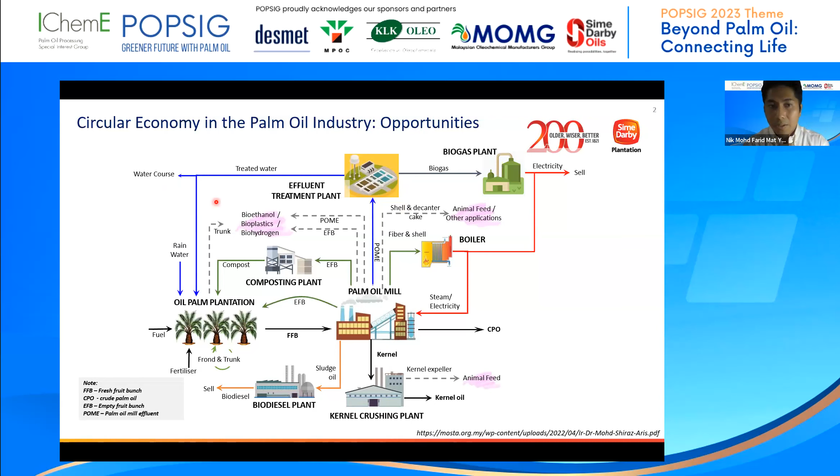So that's the current state for the palm oil mill effluent. So before we look at the problem that we have, let's look at what we have first. What we have in place is that with palm oil mill effluent, we have enough so-called nutrient inside there, the COD inside there, whereby we can generate electricity using an anaerobic process. So that's why we are using biogas plants in our mills.

With that, we can generate electricity, produce renewable energy, and then either we use it in our mills through co-firing or convert to electricity, or otherwise we sell it back to the grid. So that way we can further improve our sustainability by being self-sustaining in terms of energy.

And then in terms of another technology that we currently already have, there is the solid removal and dewatering system. This is basically to automate the system maintenance. As I mentioned before, we have the solids removed from the pond for animal feed. This one can be used for fertilizer supplement.

And then we have further treatment until we reach the water bodies and comply with the BOD 20 compliance. So all of this we already have, and we already comply with the most stringent requirement by MPOB, by DOE, the Department of Environment of Malaysia.

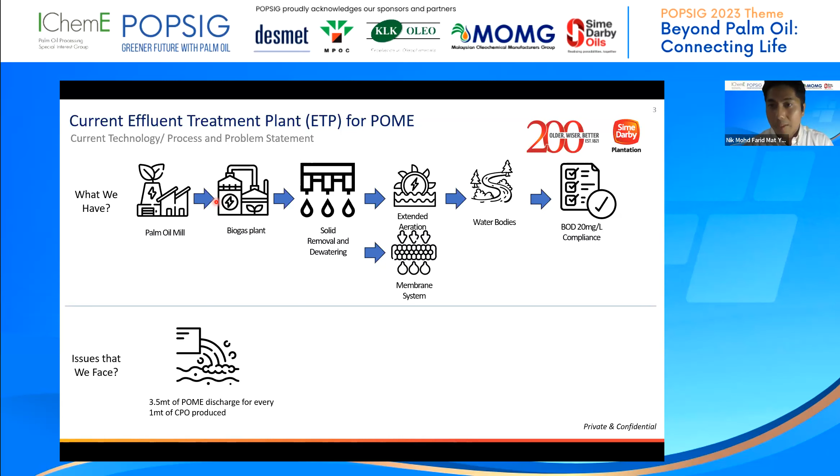So with all the systems in place, why do we need to see the gap and the problems we are facing now? So that we can further improve and take a step forward towards our target, which is zero liquid discharge. The first problem that we face is basically the volume of POME discharge itself. For every 1 ton of CPO produced, we are producing POME, our effluent, at the rate of 3.5 tons. So it's a lot of effluent being produced.

So let's imagine if we manage to develop something and retrieve all the areas, we can use them for something else: power generation, solar panels, or we can do replanting on the reclaimed area.

But because of the color itself, public perception still says that we are discharging so-called dirty water into the water bodies. In fact, we already treat it well enough for us to discharge to the water bodies.

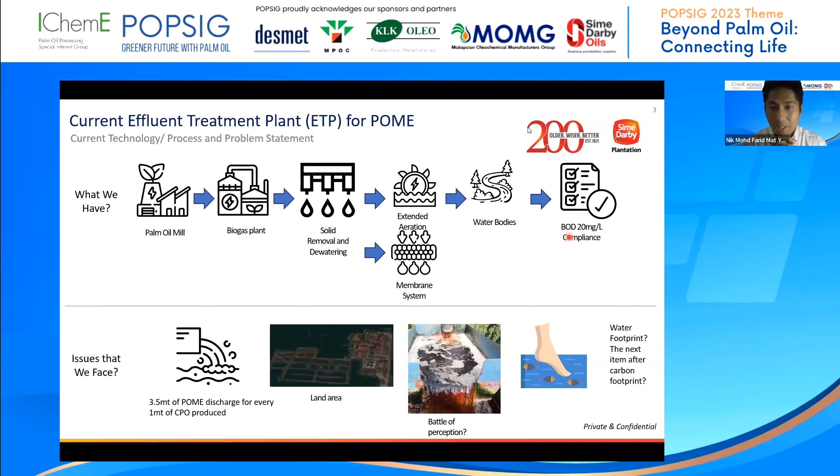And last but not least, it will be on the water footprint. As of now, the focus area that we are looking at is the carbon footprint. But once we manage to sort out our carbon footprint, aligning with the nation's requirement of carbon net zero by 2050, the next will be the water footprint. We want to reduce as much as possible so that we can make use of the remaining clear water for other purposes.

Okay, so looking at this, we need to look at the gap, the technology that needs to be developed for us to achieve the target. For us to achieve zero liquid discharge, meaning 100% of the wastewater, the palm oil mill effluent, needs to be reused or recycled back for the process or converted for any other usage. So there are two stages in which we want to proceed.

The first one is basically to reuse as process water, meaning we treat as much as possible so that we can reuse it as process water, using the water for part of the process to purify the crude palm oil during production. One of the requirements before we can reuse the water is the color itself. Even though the BOD is still okay, as I mentioned before, we want to remove the color.

But even if we manage to achieve that quality and reuse it as process water, the amount that we use in the palm oil mill will not be able to cater to the amount of POME being produced. Roughly, we are talking about only 50% of the treated POME able to be reused as process water.

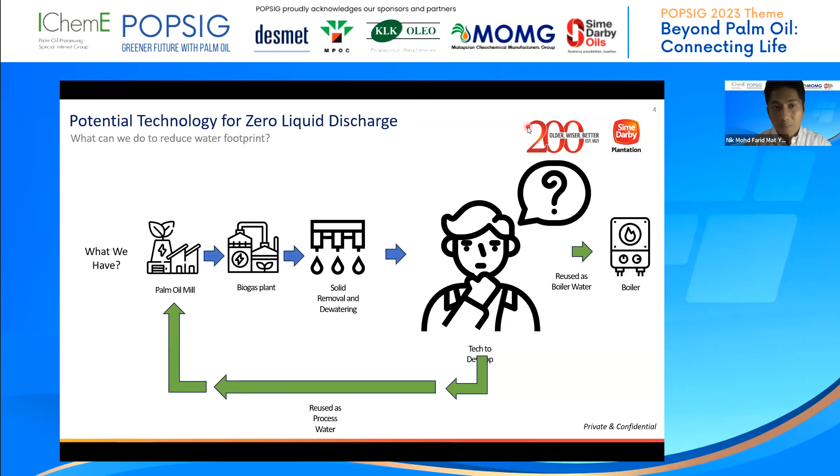And then the rest of it, we still need to discharge. So for us to be 100% recyclable, we need to look at another use case whereby it is reused back as boiler feed water for boiler treatment to produce steam for energy as well as for process usage. So these are the two stages that we have identified if we want to achieve the target of zero liquid discharge. Okay, then came the idea on how we want to go towards the colorless discharge.

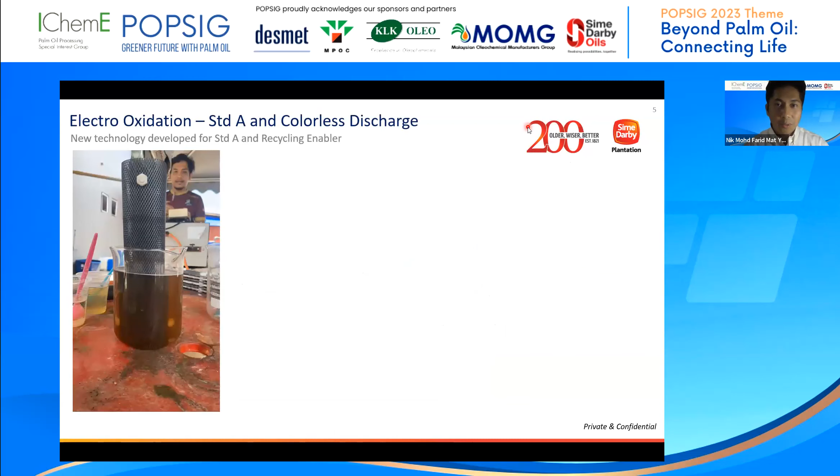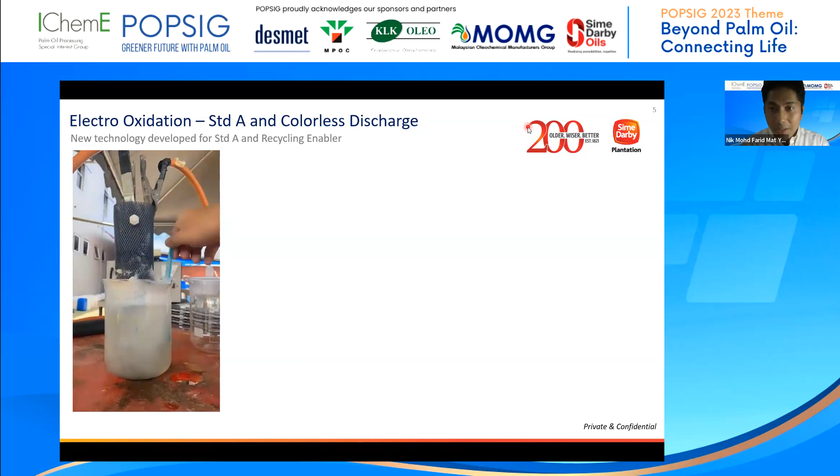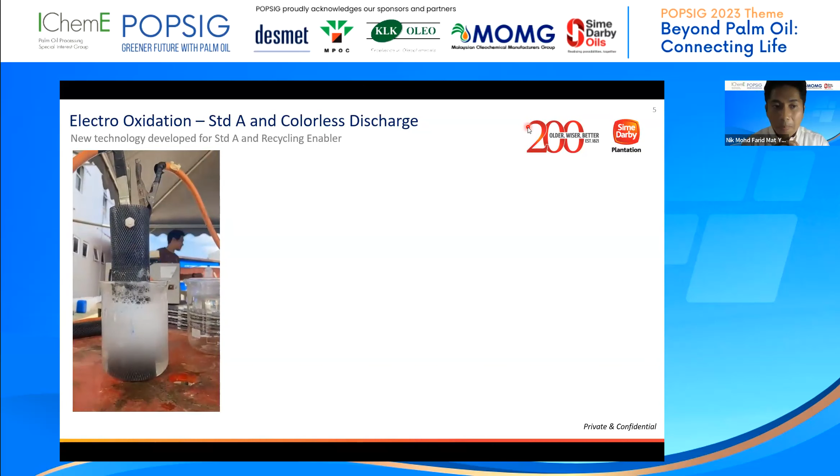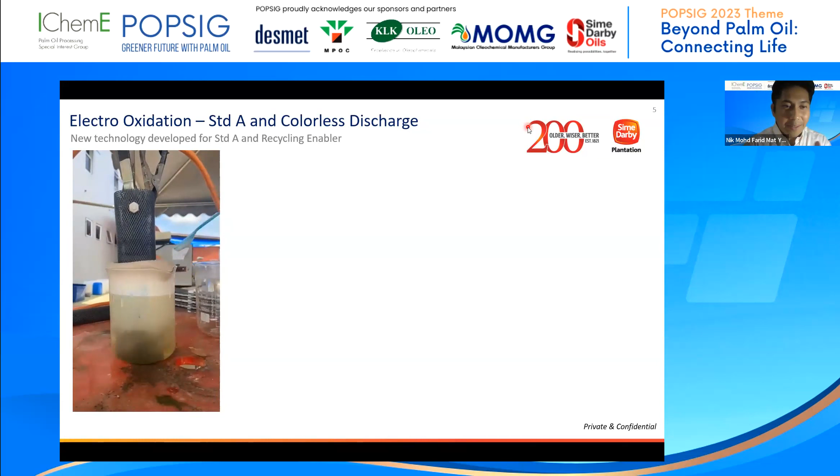So looking at the available technology in the market, we observed there's a new technology being used for the leachate treatment plant. The name is electro-oxidation, whereby it uses electricity instead of microbes to degrade the organic contaminant inside the wastewater. So we worked with a local technology provider to bring this technology to the palm oil mill. So the time-lapse video here shows, simplified at lab scale, how electro-oxidation can remove the color of the palm oil mill

POME itself. So electro-oxidation is not really a new technology. It's been researched and studied in journals for quite some time. But to bring it to commercial, there's not much success yet, mostly due to the capital expenditure as well as the OPEX. But when we developed it together with the local technology provider, instead of going with only a 2D electro-oxidation chamber, whereby we only have anode and cathode,

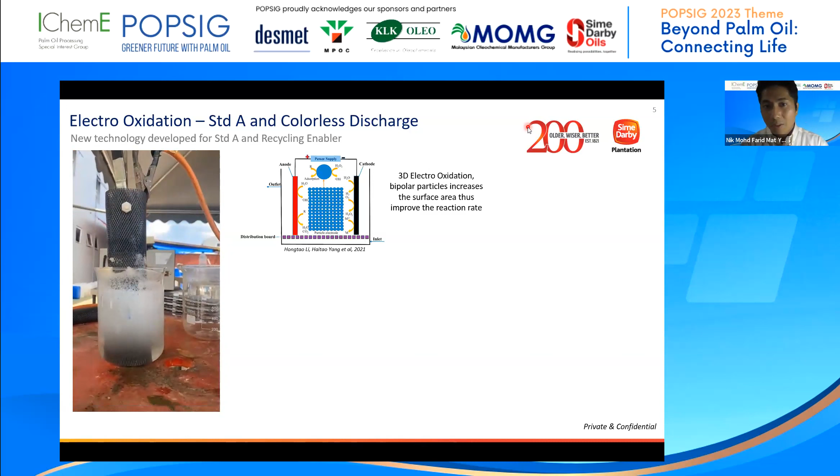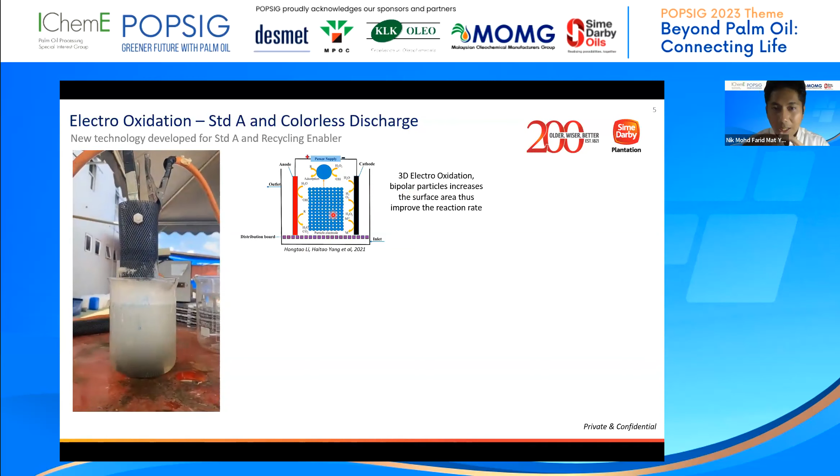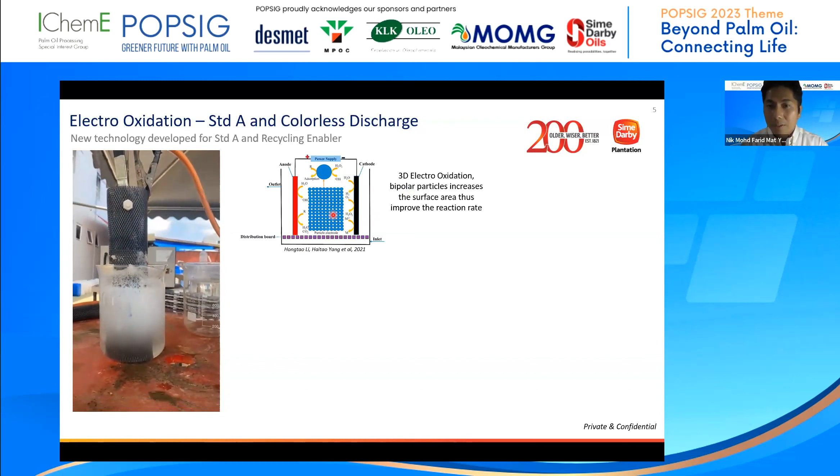we go towards 3D electro-oxidation, whereby we introduce bipolar particles in between the anode and cathode. So with this, we managed to increase the surface area as well as improve the reaction rate. That's why after the study, we managed to bring down the CAPEX as well as the OPEX to an acceptable level. Then we can proceed further with the commercialization trial. So 3D versus 2D, that's where the first innovation comes when we want to scale up.

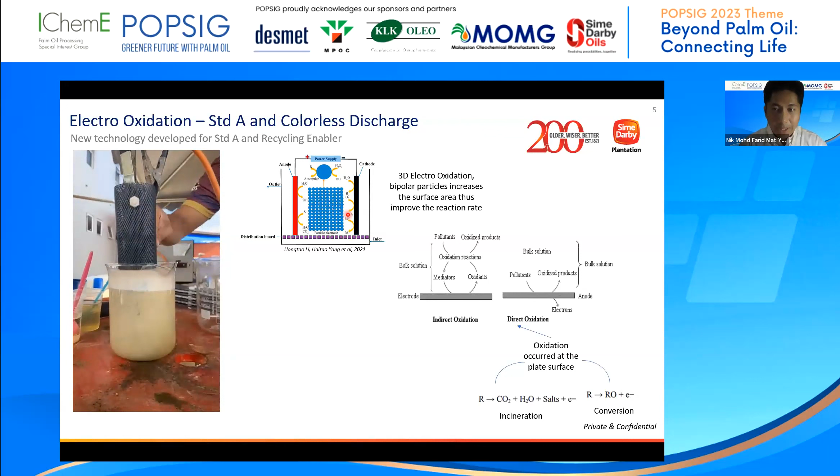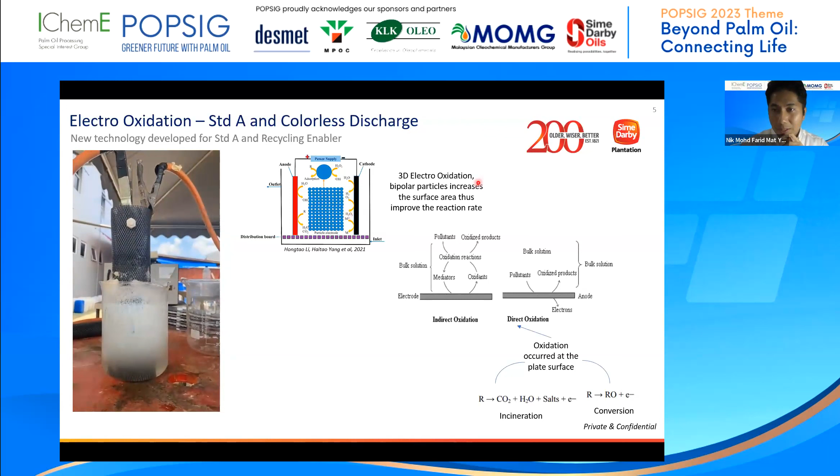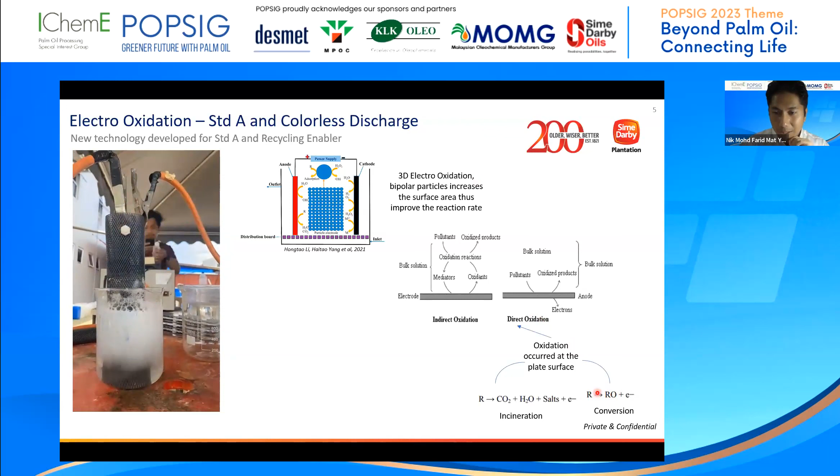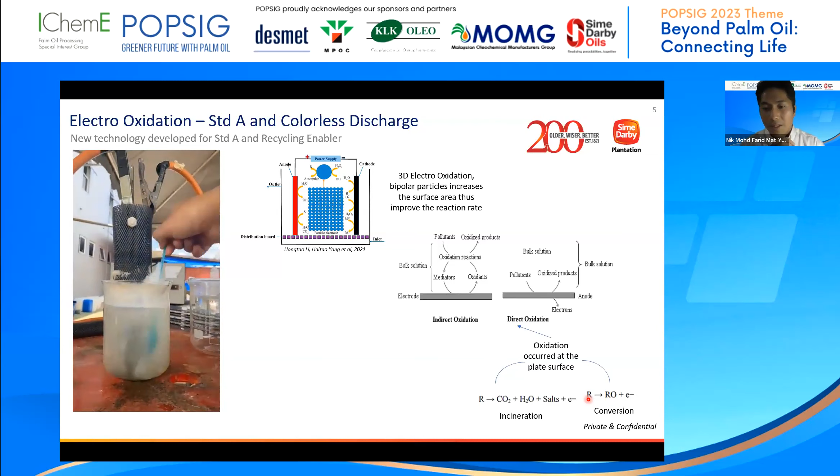And then to brief everyone in terms of what happened inside the beaker. It looks very, very simple, whereby after a certain time, the froth happens and then the color is degraded. So basically, there are two types of reaction here. The first one is the direct oxidation, which is at the plate itself. This is the simplified chemical reaction. R is the contaminant, whereby at the surface of the plate, it's converted to another material. Some of it precipitates out, and then we can remove it via filtration.

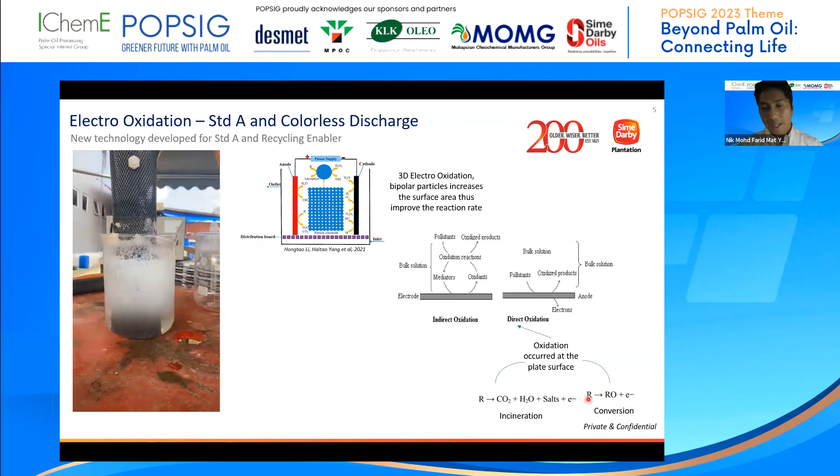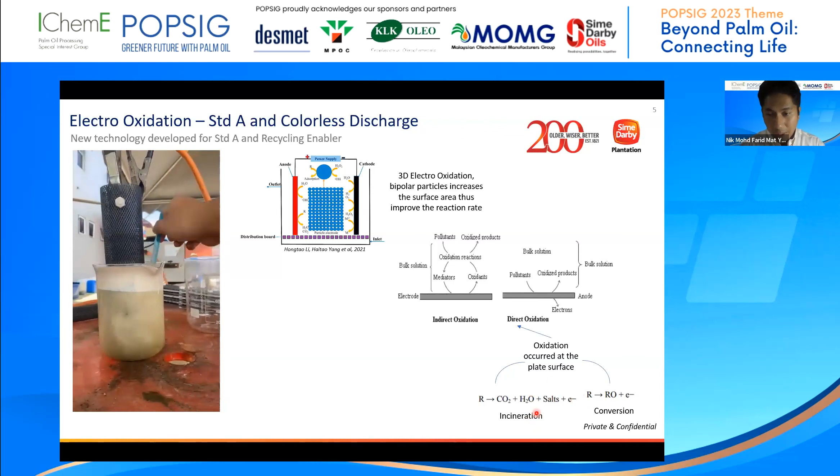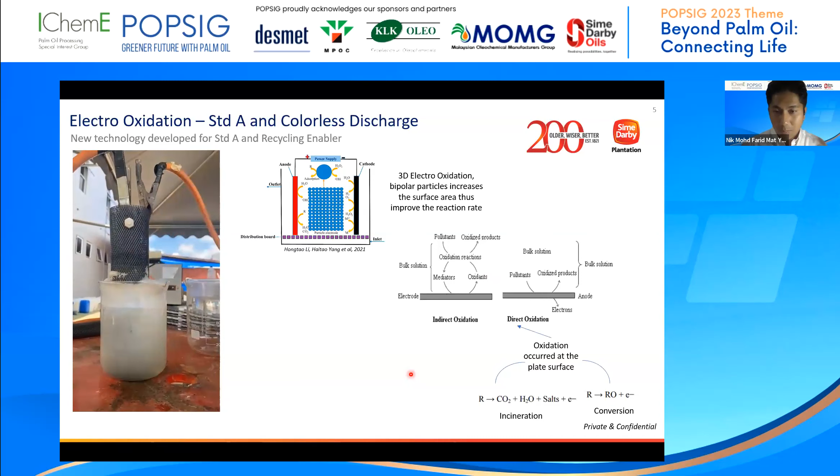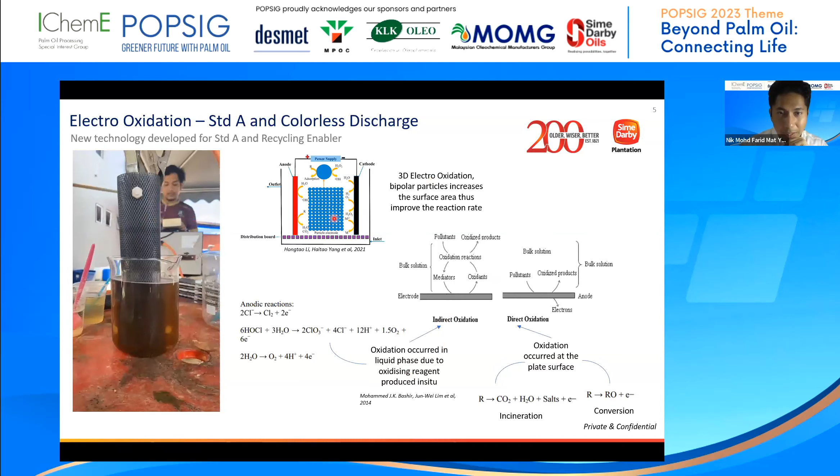And the other is further oxidized until it becomes carbon dioxide, as mentioned here, the incineration process. So the contaminant is either removed after being degraded up to carbon dioxide, or precipitates out as a solid, and then we can filter it out in the next process. The other one that happens is indirect oxidation. If you notice here, the reaction still occurs at the wall of the beaker, in between the plates as well, as shown inside the diagram here.

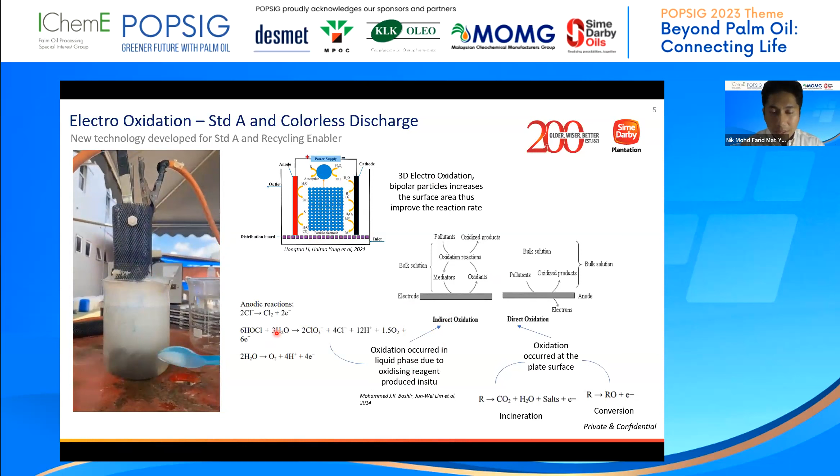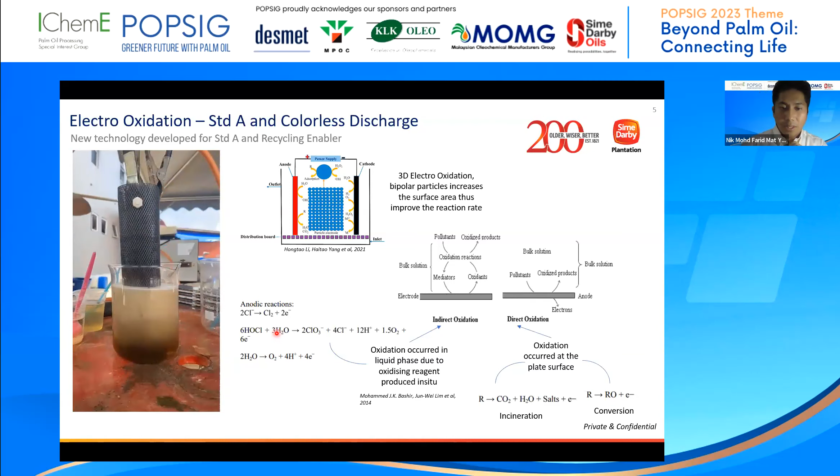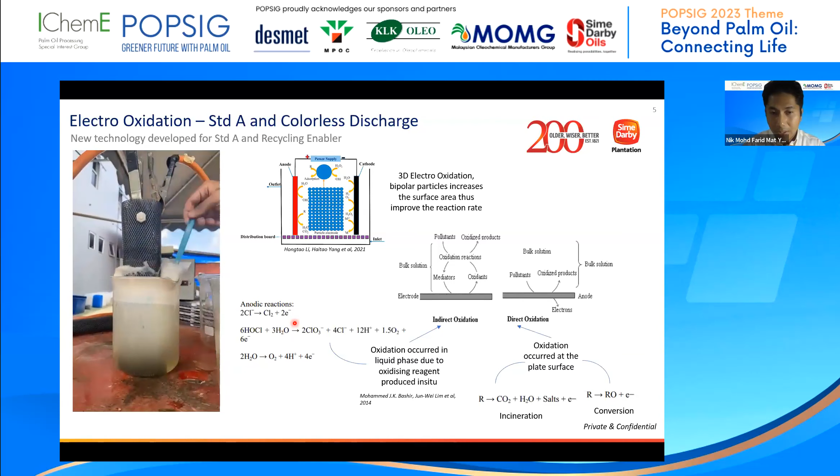So it's indirect oxidation, whereby we have several ions that already exist inside the water. Together with that, when we introduce the electrolyte, we have the chlorine, we have the sulfide. So all of it will be converted into strong oxidizing reagents. We have chlorine, hypochlorous acid, H2O2, hydroxyl radical. So this is part of the equation and the anodic reaction. So with direct oxidation as well as indirect oxidation from the oxidizing reagents, we managed to remove the contaminant well enough that we produce not only Standard A, BOD 20 milligram per liter, but also colorless effluent.

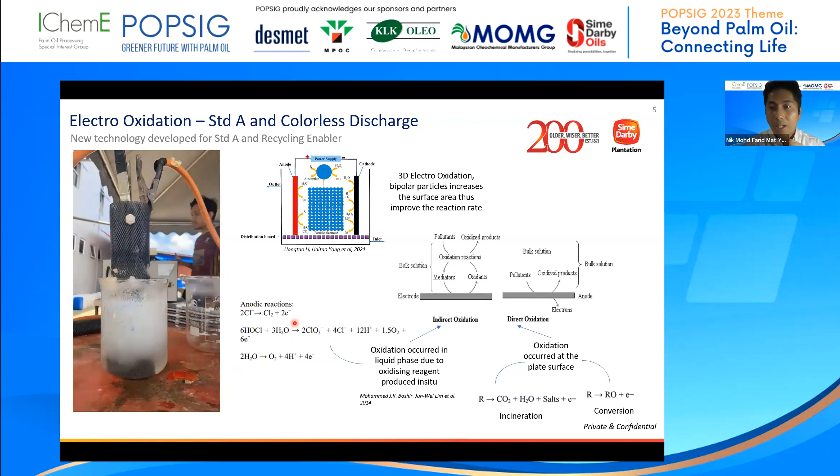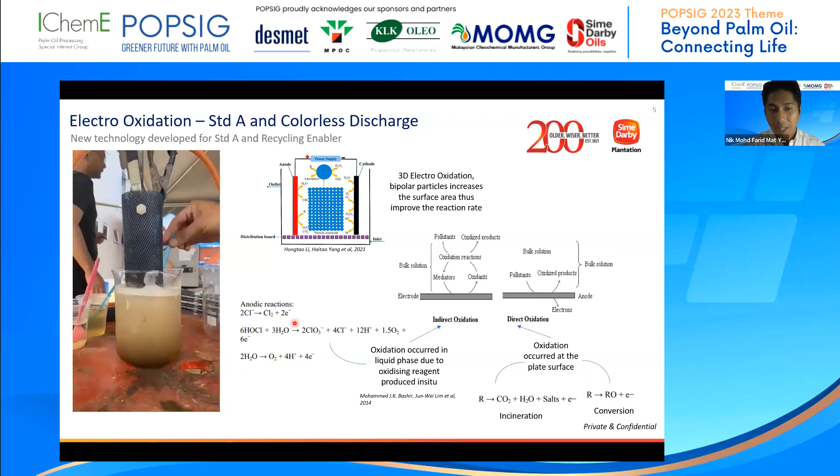Before this, the only other technologies that managed to remove color were either membrane or ion exchange, however at the expense of cost. So this is another alternative to remove color from palm oil mill effluent. So looking at the theory just now, how do we implement this at our current setup? As mentioned before, we have a biogas plant, we have a solid removal and dewatering system. We also previously had extended aeration as well as membrane filtration.

So electro-oxidation will replace the aeration process. The biogas plant, solid removal and dewatering system will still be there because we can extract the valuable energy, and we can produce solids from the removal which have nutrient content. So we're going to replace the extended aeration with electro-oxidation. I will brief roughly what the technology is all about. Since we are using the electrochemistry route, conductivity is very important. That's why electrolyte is introduced inside the mixing tank. The type of electrolyte will depend on the pH and what kind of indirect oxidation we want.

If we want to go towards a chlorine-based reaction, then we can use sodium chloride or hydrochloric acid. Or if we want to go towards the sulfate-based, oxygen-based reaction, we can use sodium sulfate or sulfuric acid. So the electrolyte will be decided on a case-by-case basis.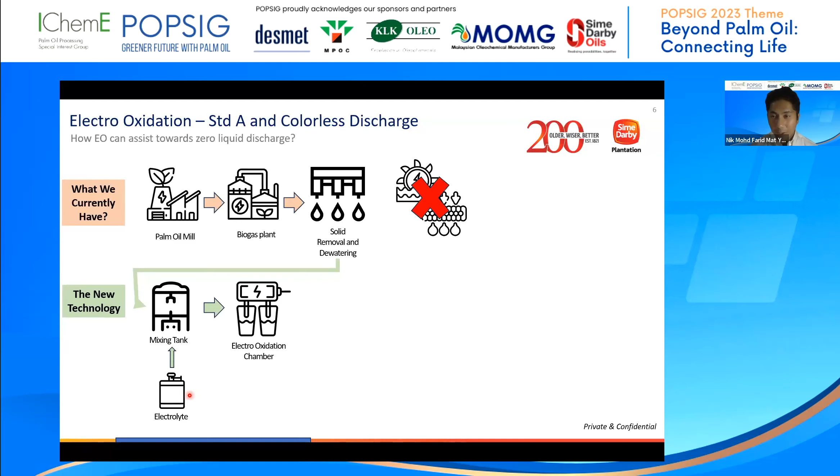And then we have the electro-oxidation chamber. So design-wise, we need to decide which is the best plate arrangement, what kind of electrolyte is being used, and the plate material itself, what kind of material we are using. All of that needs to be considered and then designed into the process.

And after the treatment, the pH by right will increase to 7. So regardless of what the initial pH is, if we go towards the alkaline reaction, it will reach up to 7. If we go towards the acidic as well, it will increase to 7. However, we still put in the pH adjuster so that we can have a solid 7 to 8 range to prepare for the next stage, the boiler feed water treatment. So we have the pH adjuster.

And then after that, just now I mentioned the precipitation. So we have the sand filter and activated carbon filter to further polish the effluent. With that, here is the feed material after the biogas plant, after the solid removal and dewatering, and we managed to get the treated water colorless. So with this, we can win the battle of perception because we already produce good enough water to discharge, and in fact to be reused back as process water, as colorless as mineral water.

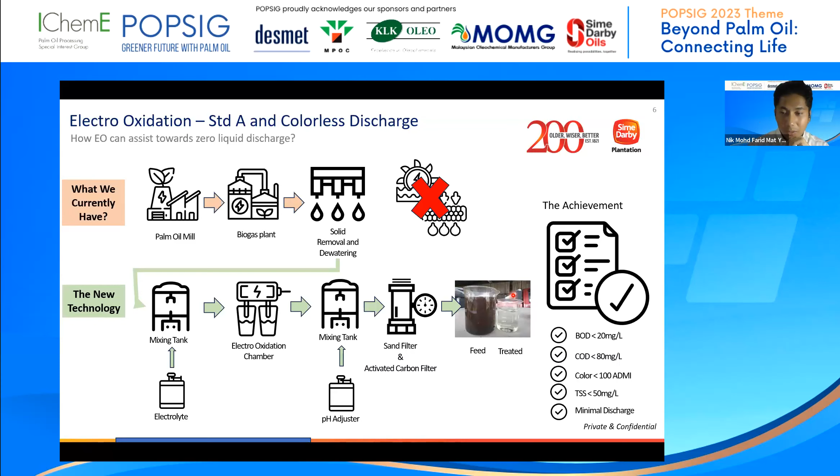In terms of quality, we achieve these pillars: the BOD, COD, color, and TSS. Here, we have not yet achieved zero liquid discharge, but we managed to achieve minimal discharge. So this can be used for process water, but not 100%. Some of the balance of the treated effluent still needs to be discharged to the watercourse. That's why we use the term minimal discharge.

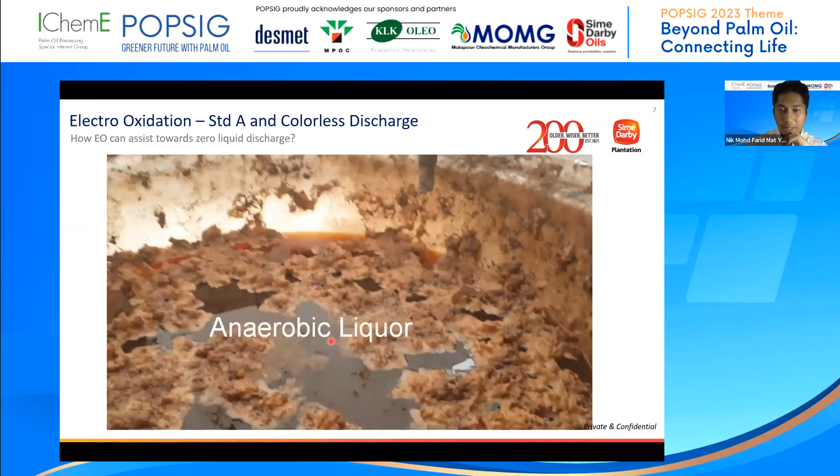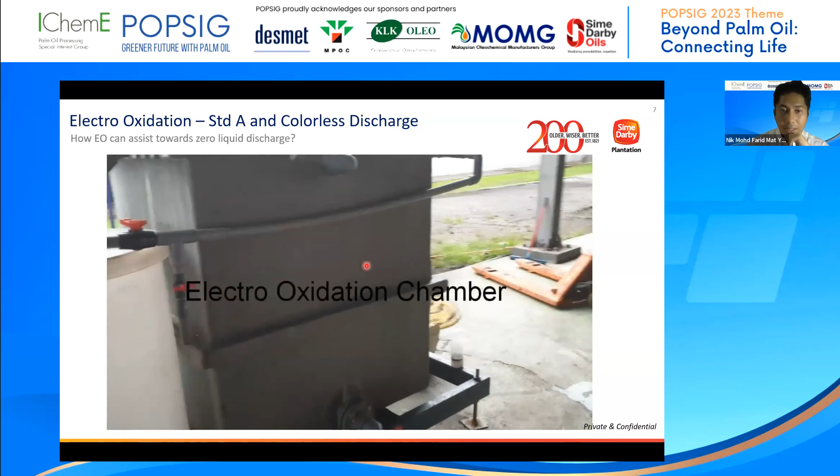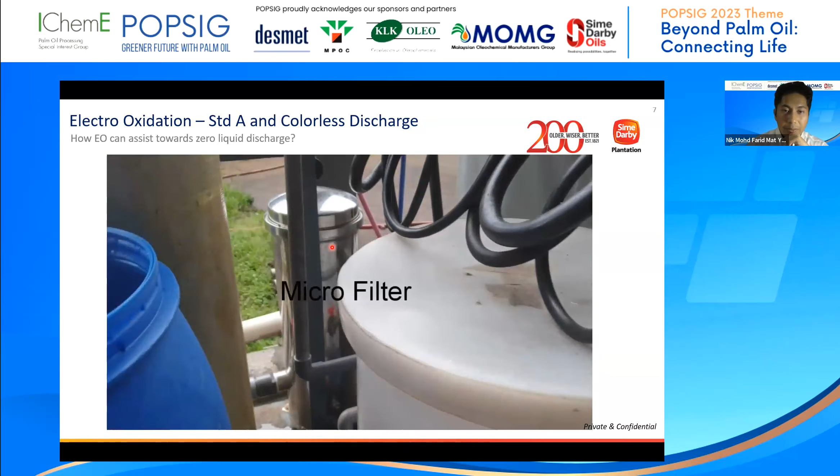So this is the video. The feed from the process, we already adjust the pH, adding the electrolyte. Then we have an AC-DC transformer. We're using DC current instead of AC. And then this is a simple electro-oxidation chamber that we have, a simple buffer tank, and then we have a pump. We have a microfilter, sand filter, and activated carbon filter to polish and remove any precipitation from the system.

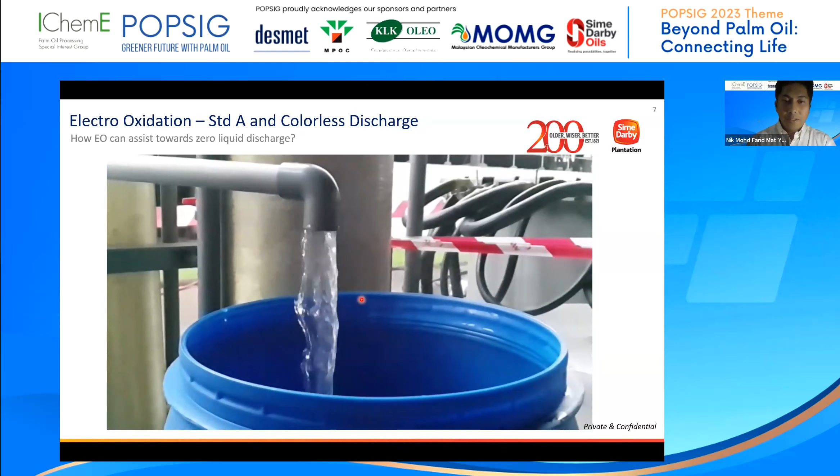Okay, and then this is the water coming out of the treatment. So it's very simple, easy for us to automate, and easy for the operator to run the system.

So with all the figures that we have and the testing that we have done, where we are now on electro-oxidation to achieve minimal liquid discharge: basically, we are putting up a commercial plant with a capacity of about 15 tons per hour, 15 cubic meters per hour, at one of our mills in Johor. The system is almost completed. We are finalizing the installation, and within a short period of time we can start commissioning and run the process to verify the data from our pilot plant. So this will still be a commercial trial at one of our mills.

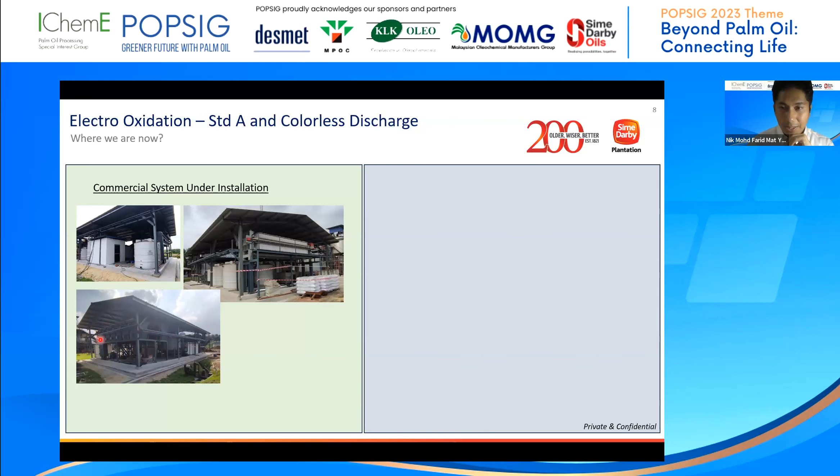The process flow remains the same. We have the filtration, the electrolyte addition, and also the electro-oxidation. If you can see here, this is where the chambers align. We have 12 chambers here to cater for the 15 ton per hour capacity. What we want to highlight is that when we install a commercial trial, we try as best as possible to make the system future-proof. This is not just a trial to us. We want this to showcase our innovation.

So inside this electro-oxidation system, we are already putting in inline automatic analyzers for COD, AN, TSS, and pH. With that, the analyzers will continuously monitor the water we produce. If for some reason we do not comply with the targeted quality, it will automatically recycle back to the front. So we're not going to discharge any non-compliant wastewater. That's the plan with the sensors we have already put in place.

We also try as much as possible to fully automate the system. We are looking forward to a wastewater treatment plant with minimal manpower, some sort of refinery vibes. They can stay in a control room, and everything can be controlled using a tablet. So at any time they can make corrections and monitor the quality. The dosage determination, pumps on and off, everything is based on sensors and analyzers. That's what we envision, and that's what we are putting into the commercial system at our mills. And last but not least, we focus on minimal discharge.

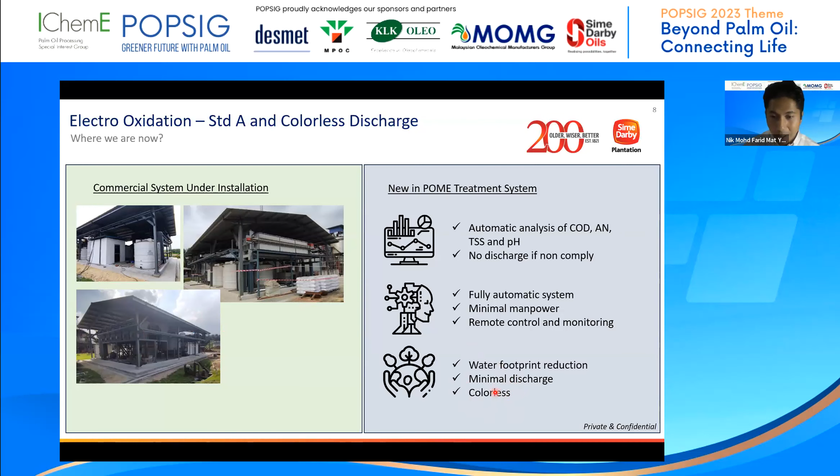And then water footprint reduction, we are talking about roughly 20 to 25% water footprint reduction. And the highlight here is on the colorless. We managed to produce colorless discharge. So with that, we've done with the minimal liquid discharge. So the next stage will be on the zero liquid discharge.

So from this, I put up another characteristic over here, which is the total dissolved solid, about 8,000 milligram per liter. The reason why I put up total dissolved solid here is because one of the criteria for us to be able to recycle it back as boiler feed water is the total dissolved solid. So it's a very big jump, TDS from 8,000 milligram per liter down to 100 milligram per liter. This 8,000 is the worst case scenario.

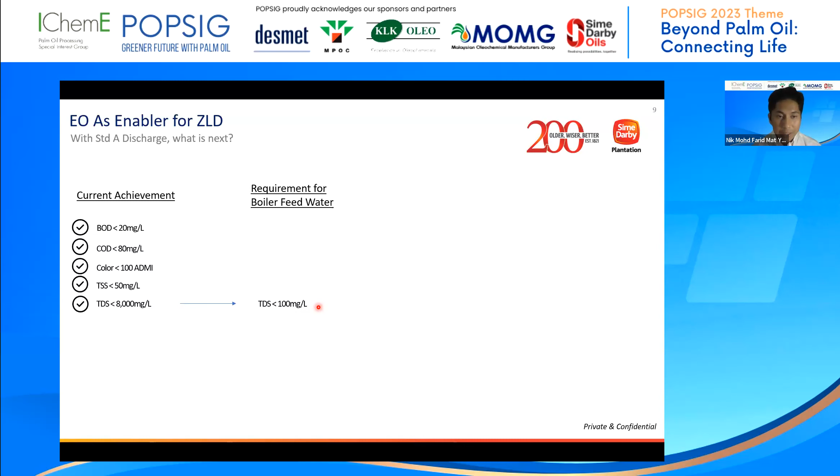Normally we get about 4,000, 3,000 milligram per liter, but we make sure whatever system we want to put in place for our boiler feed water must cater for the worst case scenario. A boiler is not cheap, so we need to make sure we do our best to prepare the pre-treatment for that feed water. Then we screened the technology, looked at what is available for us to focus on reduction of the TDS. We screened and then selected 4 of them.

Number 1 is the status quo, the best technology, the reverse osmosis system. And then we have another system that is an ongoing trend now, electrodialysis reversal. Some of the desalination plants have started to use this technology. We also have electro-oxidation, whereby we can see how we can further use the same technology to further reduce the TDS. The last one will be ion exchange, basically a demin plant.

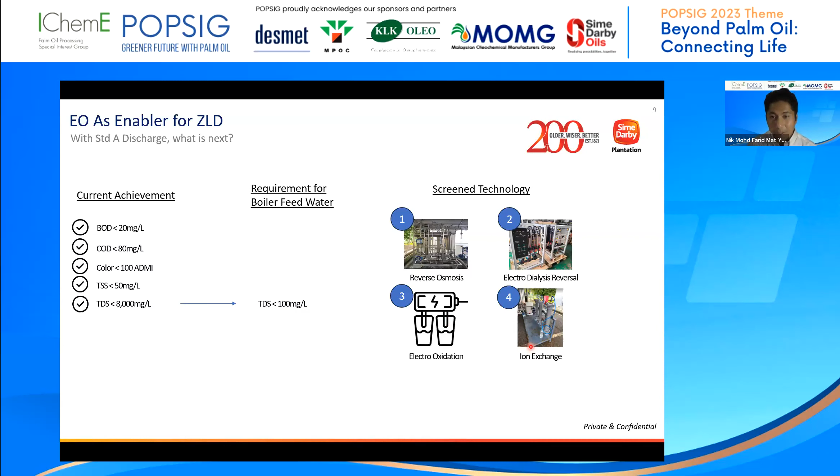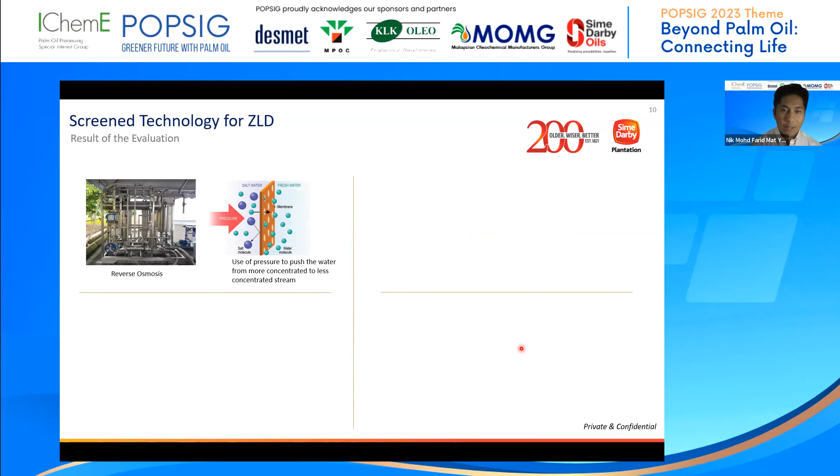So a bit of detail: reverse osmosis, we are using pressure to push the water from the more concentrated to the less concentrated stream. With this, we're producing water with very low TDS, because the TDS will stick to the retentate, the reject water. And then we have ion exchange. We are using the charges from the resin to adsorb the TDS that we do not want, the opposite charge contaminant. From there, the water coming out will be very pure.

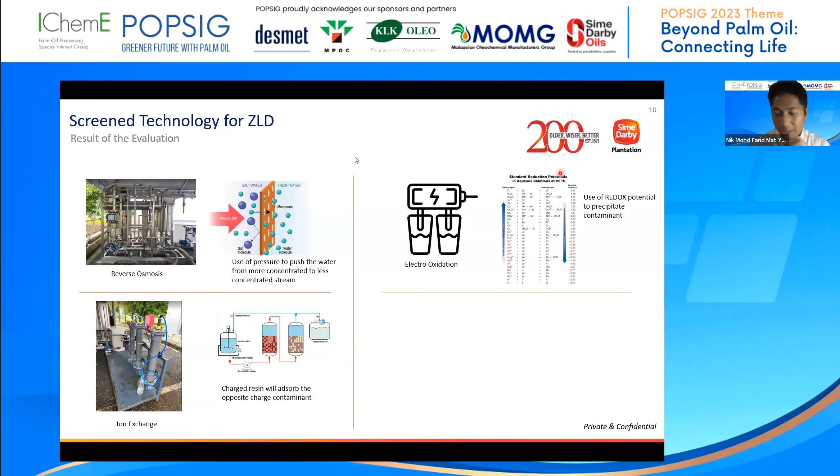We have electro-oxidation. This one makes use of the redox potential, how we can precipitate out the elements inside and then filter them out, so we can further reduce the TDS. And then the last one is electrodialysis reversal. This one is an upgraded version, I would say, of electro-oxidation, whereby we have cationic and anionic membranes in between the plates. With that, we can separate and restrict the movement of the ions, and then produce pure water. All this we evaluated using the discharge from the pilot plant instead of the commercial plant, because the commercial plant is still under construction.

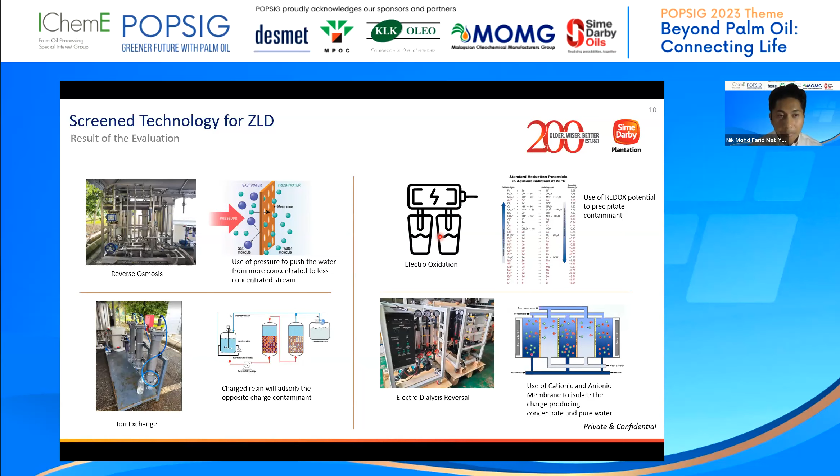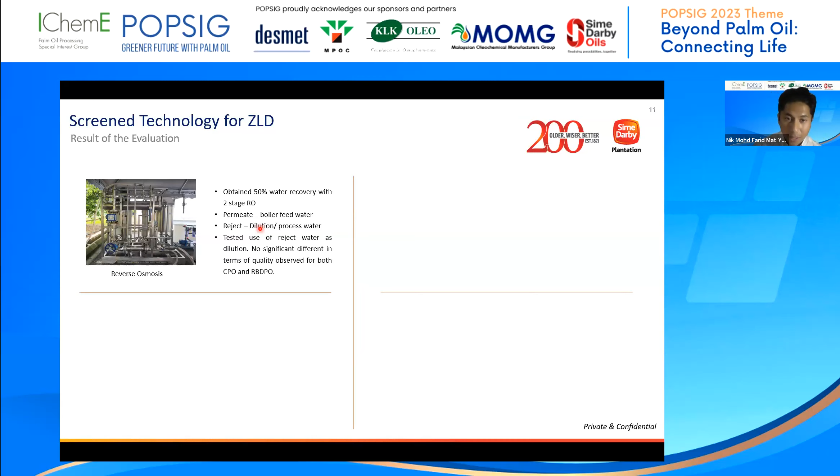And then we found out for reverse osmosis, we managed to obtain roughly about 50% water recovery using 2-stage RO, meaning the permeate needs to go through RO 2 times to get from 8,000 to below 100. When we do the reverse osmosis, the reject will be concentrated with TDS. So what happens if we use that reject water? Because if we do not utilize the reject, we create another problem, since we need to treat it before we discharge. We tested that, checking the quality of both the crude palm oil and the refined palm oil. So there's no issue to use it. Meaning, after you have removed all contaminants using electro-oxidation, the reject still has no problem in terms of quality.

The next one is ion exchange. In terms of regeneration cost, it is still acceptable. We managed to get the total dissolved solid below our target of 100, in fact 0. However, when we start to do the regeneration, the amount of water required for rinsing is very high. And the water we use to regenerate produces secondary wastewater, which we need to further treat. So that's the issue with ion exchange.

On the electro-oxidation, it is very fluctuating. We achieved an average of 60% TDS reduction.

During that time, the average was about 2,400 ppm down to 920 ppm. The problem is we base it on what's inside the wastewater to set the electro-oxidation when we want to remove the TDS, because the millivolt, the volt will be different.

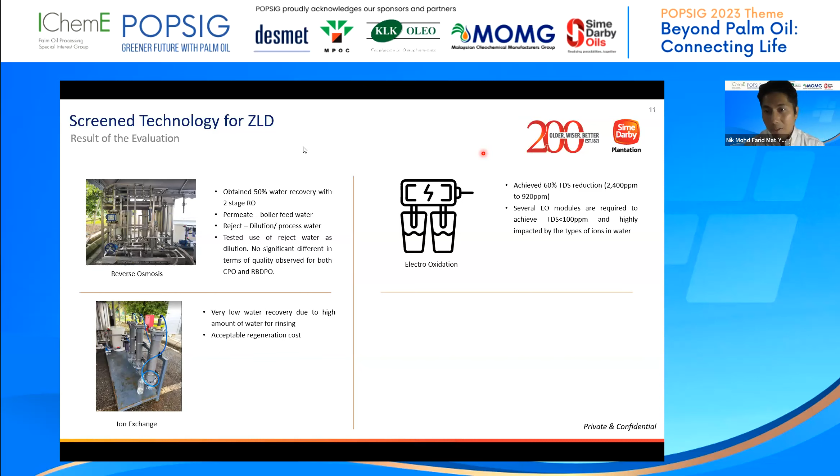So with our current process, taking the water from the river itself, the dissolved solid content inside will vary. So it's very difficult for us to operate the EO, and then we need to have several modules of it. So apart from not achieving the target, it will be very difficult to operate the process. The last one, the new one, will be electrodialysis reversal.

When we first tested this one, we knew the limitation would be the capex for this system. Since it's a new technology, the cost is very high. From the literature, it's possible for us to produce 3 streams instead of 2: one is pure water, one acid, and the other alkali.

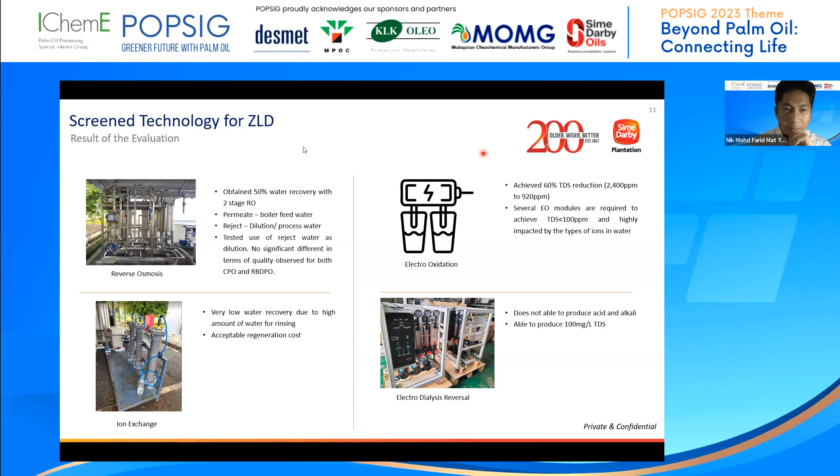During the testing, we managed to meet the TDS requirement. However, we did not manage to produce the acid and alkaline products, making it difficult to scale up later to cover the high capex. So with all the figures we have, we believe that as of now, to achieve zero liquid discharge, it will be a combination of electro-oxidation and reverse osmosis.

I will say EO is a pre-treatment now. When we talk about zero liquid discharge, EO will be the pre-treatment for reverse osmosis. There might be an opinion that we can just use the current process until extended aeration, producing brownish or reddish effluent, and immediately put up reverse osmosis. The answer is yes, we can get the quality we want, but it will not be sustainable because of the loading. The color and organic loading from POME under normal conventional treatment will expedite the replacement of the RO module.

So that's the issue if we want to directly implement RO, and that's where EO comes in as an enabler. With EO, we can reduce not only the organic contaminants, but also remove the color of the wastewater. So with that, what's next? What do we want to do? How do we want to validate?

We have the data, but we want to further validate it by side streaming the commercial EO plant. Once the commercial EO plant is completed, we have already installed the pilot RO plant that we tested before, but set up to be easier to operate, with everything dosed in line so that it is sustainable when we operate this pilot plant for a longer period. So it's on the validation afterward.